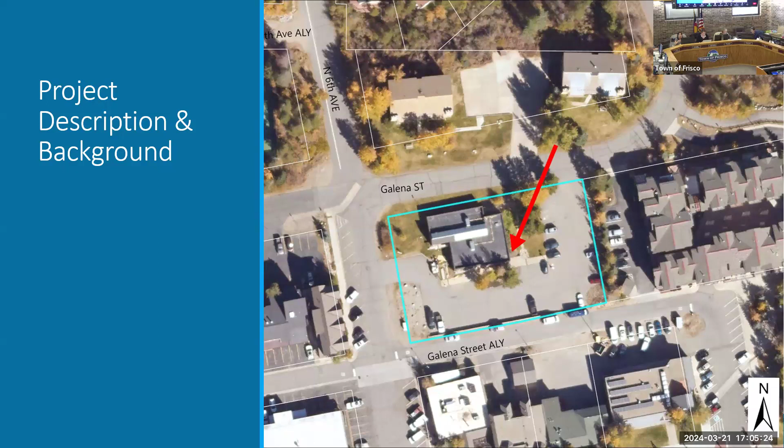Turn the volume up a little bit in the room. Thank you, we just had a request from the audience. Thank you. Yep, no problem.

Sorry — oh no worries. All right, here's just an overview of the site plan. Just as some background, the Planning Commission did review the sketch plan of 602 Galena Street on August 17th. There was a prior sketch plan before that, but the one on August 17th is most relevant to tonight's final review.

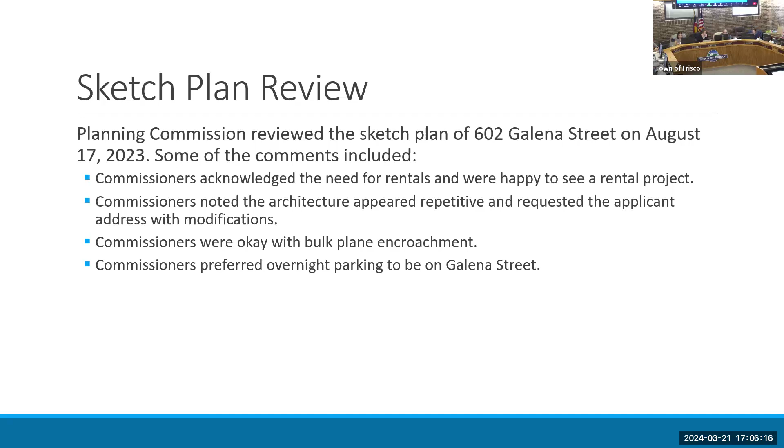At that time, commissioners acknowledged and appreciated the rental aspect of the application. Commissioners noted that the architecture appeared repetitive. They were okay with bulk plane encroachment and preferred overnight parking to be on Galena Street rather than Sixth Avenue. This is just a few of the comments; the complete minutes were in the staff report for that meeting as well.

So that is one of the requirements, that all units have to be deed restricted. For this project, each dwelling unit, to meet the code requirements and be eligible, shall be deed restricted with an average AMI not to exceed 120% for the project. The applicant is proposing to utilize this program and is therefore eligible to receive certain zoning flexibilities as outlined in that code section.

Starting with dimensional standards, the maximum density in the Central Core District is 16 units per acre. For a 0.72 acre site, that would allow for 12 units. However, the applicant is proposing to utilize the affordable housing incentives related to density bonuses and is proposing 54 total units, all deed restricted rental units with an AMI of 120%. If the Planning Commission finds that the additional units do not detract from the character of the neighborhood, then the application meets the density standard.

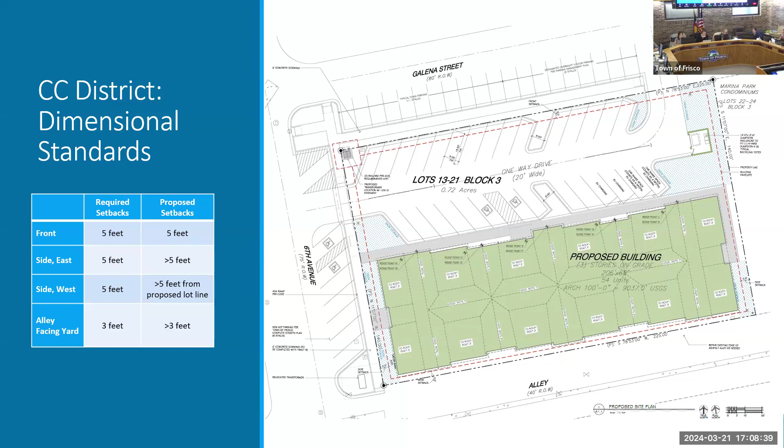One thing I want to touch on: affordable housing developments are exempt from step backs on alley-facing facades. However, the development is still required to have a 10-foot step back along the facade facing 6th Avenue. The code states that step backs shall be taken from the 3rd floor and above of street-facing wall facades. The application is not meeting this requirement, but staff has talked to the applicant about modifications and believes they can be made. Staff finds they will be able to meet this requirement with modification, and therefore recommends the Planning Commission add a condition of approval requiring the applicant to meet the 10-foot step back requirement on the western building facade prior to building permit submittal.

Moving on to access, grading, and drainage, this has been reviewed and approved by the town engineer. The applicant is proposing access from Galena Street and from 6th Avenue. The two accesses create a one-way drive with the entrance on 6th Avenue and the exit on Galena Street. Access meets the requirements for Public Works and Summit Fire. The red line plans in the packet show comments that have been addressed—those were referral comments the applicant first received, and revisions were made, including increasing the drive aisle width for Summit Fire, which was a big change.

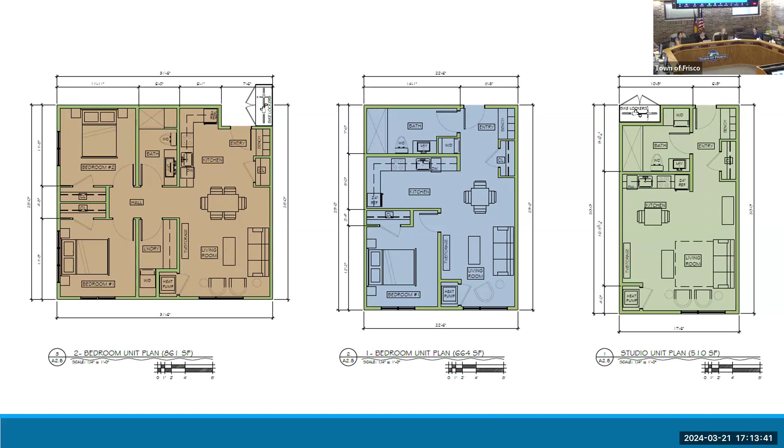This is a breakdown of what each unit type looks like. The applicant is proposing 21 studios, 21 one-bedrooms, and 12 two-bedrooms. You can see how the bike storage lockers were incorporated into those units.

The applicant is showing a trash enclosure on the east side of the parking lot that will be consistent with the materials of the building. Staff had recommended a condition of approval that elevations and a letter from a waste management company be provided at time of building permit submittal, to ensure wildlife proofing and accessibility for the waste management company. Since the writing of the staff report, the applicant did provide both of these, and staff found them to meet code.

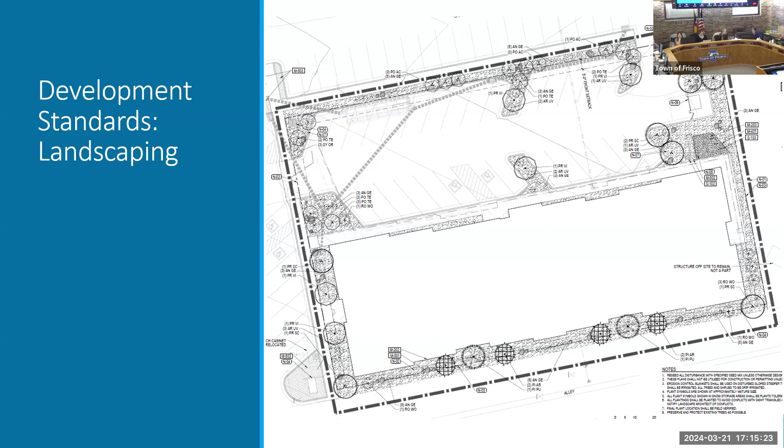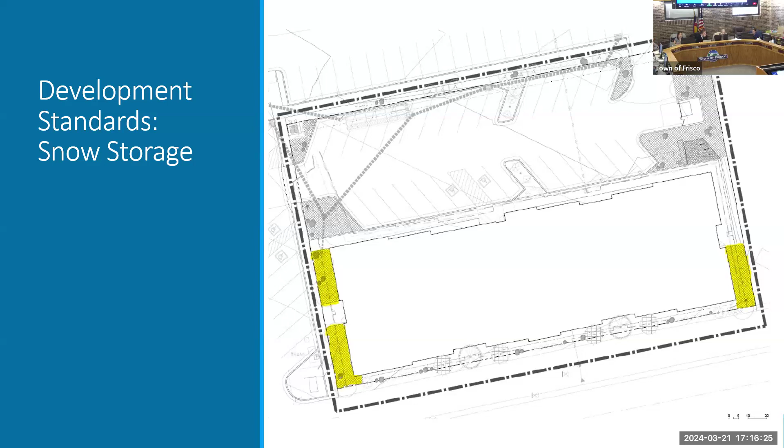The UDC specifically states that all snow storage areas shall be located lengthwise adjacent to the applicable paved areas. Staff did question whether the application meets this standard based on the highlighted sections on the site plan, and whether those would be considered lengthwise. The applicant has provided a supplemental narrative addressing snow storage and requested the opportunity to present their case to the planning commission, so I'll leave that there for now. If the planning commission finds that the proposed snow storage plan meets the intent of the snow storage section, then the application meets this standard.

Moving on to facade standards, the proposed buildings demonstrate building articulation through the use of at least 2 of the 7 techniques outlined in the UDC. At sketch plan review, the planning commission commented that the architectural elements appear repetitive. The applicant did not modify the facade between sketch and final. However, staff does find there is some architectural relief from the duplication of units through the use of building materials, and therefore finds that it meets that standard.

Proposed exterior building materials include horizontal siding in sand and vertical siding in a coffee color, as well as split-faced CMU tiles in dark gray. They do have a material sample board on the table over there, so we can pass that around later. The proposed roof forms generally deposit snow away from parking areas and walkways, and the flat roof is augmented by pitched roof elements, with proposed pitches of 9/12. The application is meeting the building material requirements and the roof requirements.

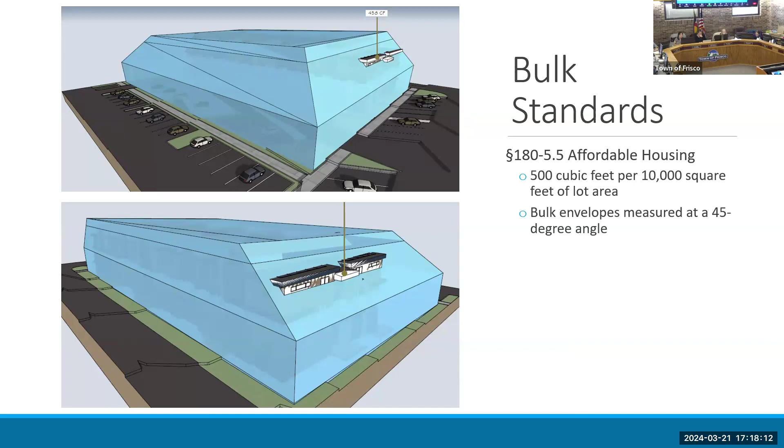So that's all I have for the presentation. For recommendations, we'll leave it up for the planning commission to discuss, but should the planning commission determine that the application meets the criteria of approval, staff provided recommended findings in the staff report. And again, should the planning commission determine that the application meets criteria of approval, staff has provided recommended conditions.

These were the conditions listed in your staff report. You can see the one crossed out is for that trash enclosure elevation. They did provide that, and that was really just to ensure it was fully enclosed and wildlife proof. So staff does find that it's meeting that, and therefore crossed that out. And then also adding that condition at the bottom after talking to the town engineer with the traffic study, adding that intersection as an addendum to the traffic study.

That is all I have for now. I know the applicant is here and can answer questions. I can answer questions too. You did receive a public comment today submitted by Jim Kidder on behalf of the Scattered Pines condo development, so everyone got a physical copy of that for the public record. Thank you, Emily. Questions for staff?

April, we'll start with you. Is the Town of Frisco responsible for snow plowing the alley? Yes. Okay, and that snow, where does it get stored today?

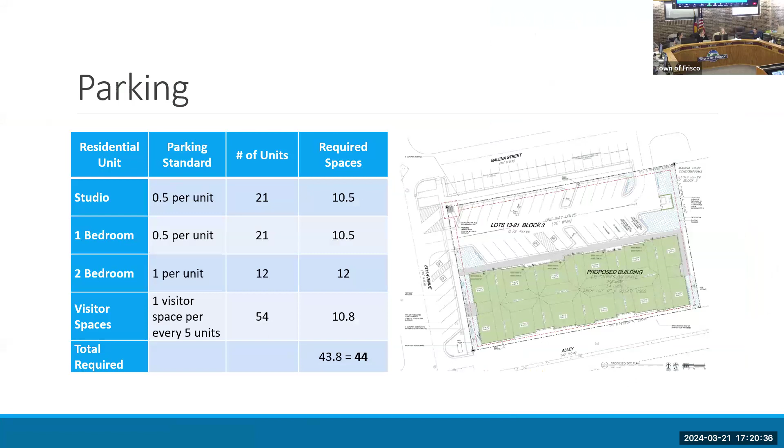Jessica, any questions for staff? Yeah, and sorry, I probably should know this, but can you give me an understanding of the genesis of this project with respect to town code? In terms of the 120% AMI, did this—yeah, I think you're nodding, so.

Yeah, so there were revisions made, and maybe Katie can touch on this a bit more because it was brought to town council. Town council ultimately approved the 120% with a recent ordinance. That was from a planning commission recommendation that went to town council, and then it went to town council a couple times, and ultimately they changed that percentage to 120, from 100. It was 100 for this district, yes, and now it's 120. Yep, that is what it is.

Okay, but when it was before us, was it 140? It had gone up to 140, right? And then council changed a lot—pretty much everything that had been proposed got modified a bit, and it was just a clean change in the code to: a development project with an average of 120% AMI would qualify for the affordable housing incentive.

So before that it was 100% AMI. Now any development in town that's 100% affordable, up to 120% AMI average, qualifies for rentals. And Katie, can you push your mic closer when you speak? For rentals, and also for ownership? Same thing, okay. Yeah, they're both under—we didn't separate it. The planning commission had asked the council to consider having some differences between rentals and owners, and they didn't.

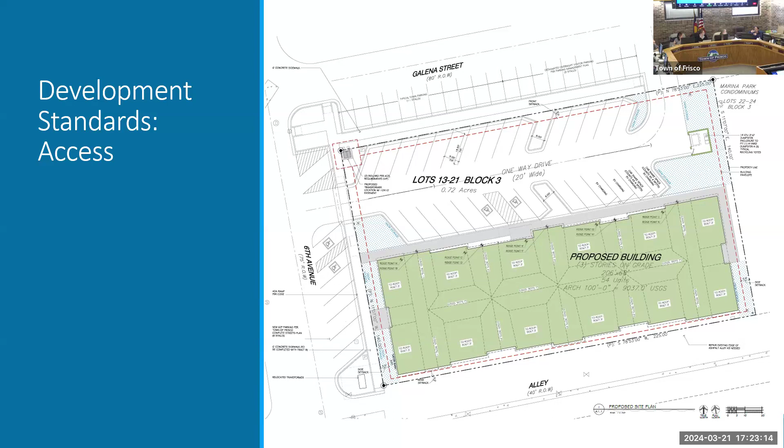One quick question about the facades, the longer length facades - you said planning commission had expressed some concerns that they looked similar to one another, but staff was able to find that they didn't look similar. Could you go over what you found? Looking at the code, it states that they shall provide relief from the duplication of units. It doesn't give a threshold of how much that is, and it doesn't give those specific techniques you see in the earlier sections of the code as far as articulation standards. So given that there is a change in building materials, it does limit the duplication. They're still quite repetitive, but there is some relief from exact mirrored images.

But it's based on the building materials. Yes. Okay, so those are different horizontal materials from one to the next? Right, switching it up and adding the blocks on different sections. Okay, I might ask the applicant to take me through that - they're a little different.

If they were just standard conditions, you said in the proposed conditions of approval to meet the requirements from Public Works and Town Engineer - were those all very standard things? Yep, the applicant shall satisfy the conditions of Frisco Public Works and Town Engineer. Those are just standard. They've already addressed the comments that were given to them, those red line comments. I like to keep those in there just as a reassurance that when it goes in for building permit, if something needs to be tweaked, for Xcel, for transformers or whatever, that we have that ability.

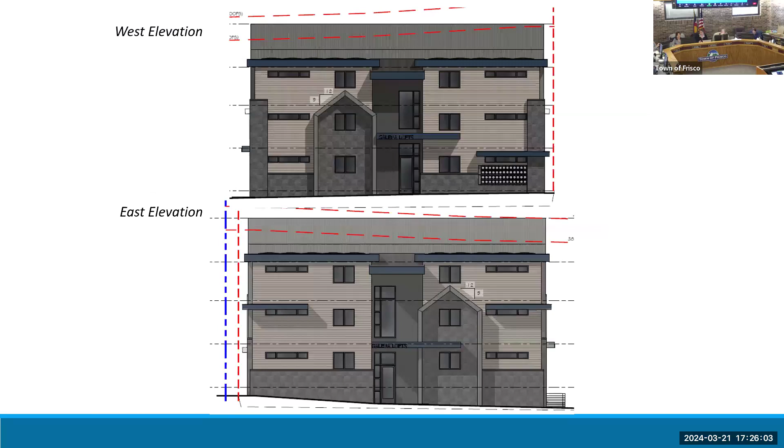So you talked about the repetition - if we look at the rendering, there are basically 2 or 3 materials shown. This is the same sketch that was delivered at the first hearing. They did not change the facade or materials. They didn't add or detract any - so this is really all the same as it was, just a different interpretation on your part. Okay, and then I'll ask them about parking and solar.

Any questions for staff? I guess I had sort of the same question, I wasn't clear - if there were no changes made, is that typical? I mean, if we have a finding at sketch that this is what we thought and it comes back the same, it seems like it's ignoring the comment. I don't know if there's a question there - it's not more the same, I just wanted to make sure I understood that nothing changed. The facade has not changed.

As I stated, there's not a certain threshold on relief from duplication. It's not like the section before, when it comes to articulation, which has very specific criteria - it needs to meet 4 out of 7 or 2 out of 7 techniques. The standard for duplication is more vague, and therefore I can find an interpretation that using and changing building materials means they're not exactly the same each unit. I left it at that, but planning commission can definitely comment on that.

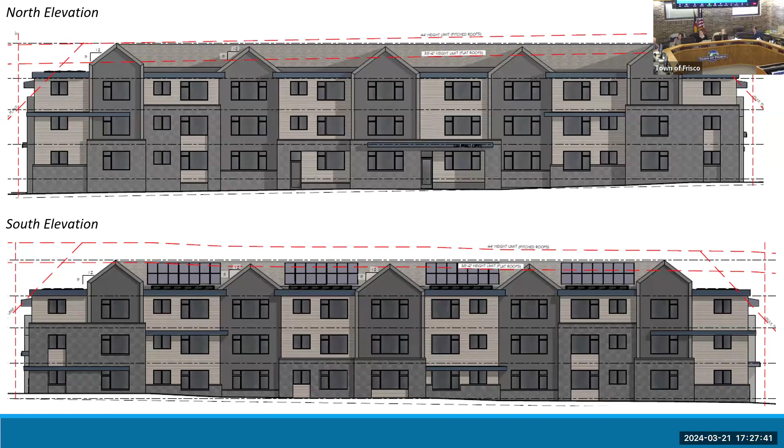I had a couple questions about the step back in the building and the dumpster enclosure elevations and all that kind of pops up at the last minute. Why wasn't that caught sooner?

So the step back, and it should have been caught sooner - there is an interpretation, or a misunderstanding, that because there's 10 feet from the property line, it didn't have to meet the step back requirement. But reading it word for word, it definitely does have to have a 10-foot step back from the floor below. The code states from the floor below, not from the setback line, not from the property line, and unfortunately I caught it late. Okay, that makes sense. Yeah, I can see how that would be confusing.

Yeah, and it is exempt from the alley side, so it's just that one facade on the street. For engineering, 6th Ave, yeah.

On the parking, a 2-part question. I'm pretty sure it says in your staff report, and I just double checked it, that the 11 extra parking spaces will be constructed and managed by the town for public benefit. I guess I'll need to double check on that, I may be confused. The additional 11 parking spaces proposed on Galena and the 8 on 6th Avenue are to be constructed and managed by the town for public benefit, so they will be public parking spaces. My understanding was that they were going to be constructed by the applicant with the building. I'd have to confirm that, I guess.

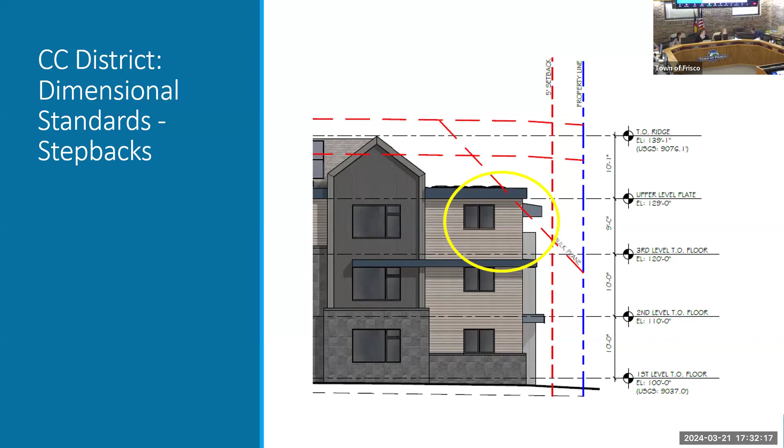Hello, Planning Commissioners. Thank you very much for your time tonight, and staff, thanks for working with us on this. My name is Megan Teston. I work for Norris Design and I'm representing the applicant. Neil Drobenair is here with NHP, and also this is a partnership with the town of Frisco.

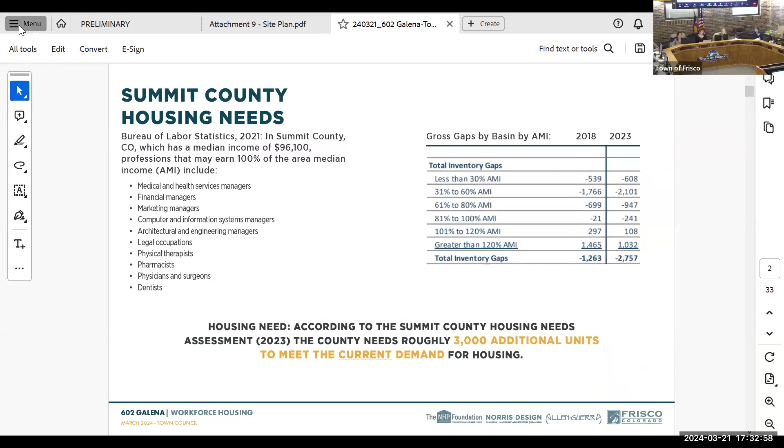So I know we've seen a lot of this. You can go to the next slide, Emily. But just a little bit on background on needs - we're really looking at almost a 3,000 additional unit need for affordable housing within our county. I just want to bring that up again as a reminder to the importance of this project, putting affordable housing where people can actually live and work and commute all at the same time.

A little bit about NHP Foundation - they're a non-for-profit foundation that does affordable housing exclusively all over the country. They have a mission and values and a vision, and this is what they do. Not only do they develop it, but they also long-term manage properties as well. They do neat things like give people credit, help them build credit for paying their rent on time. They'll issue statements like that for banks to hopefully help people with upward mobility. So I just want to make sure we kind of keep that in mind.

And I know that some of the planning commissioners haven't heard the spiel, so I'll keep moving quickly. But as I said, NHP also is working with local stakeholders and they're in a partnership with the town on this project to be affordable housing in perpetuity.

I think this one's really interesting too, though. The site context here - if you look at the half-mile and one-mile radius, we're really locating housing in the heart of town and also at the heart of transit within the county, which is one of the neat things that Frisco has to offer in terms of being able to be truly mobile without the use of an automobile.

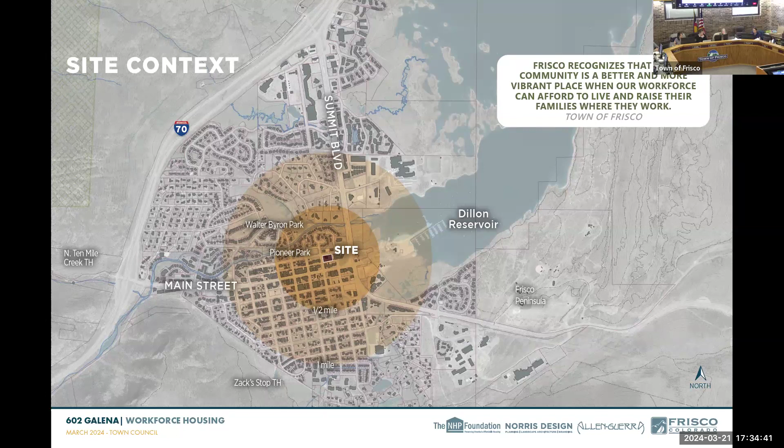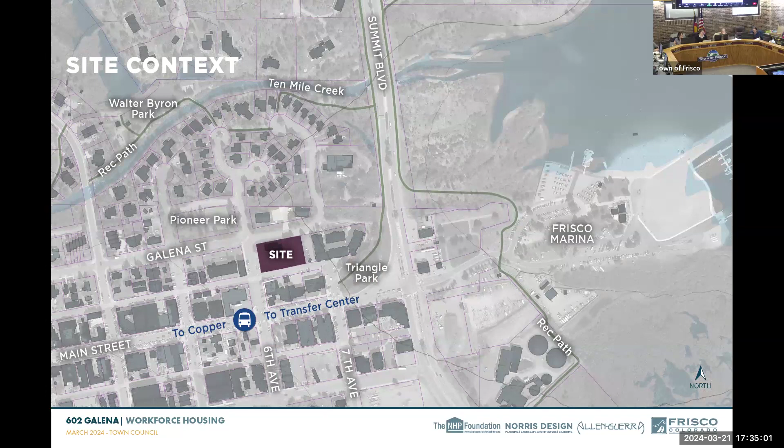A little bit closer zoom into where we are. You can see 6th Avenue, Main Street, the proximity to both Pioneer Park and Triangle Park, and also the kind of transfer in between the commercial frontage on Main Street and a more residential community in the back - by back, I mean north.

Here's a quick site plan for us. It shows the landscape as well as the parking and the building. I'll just really quickly talk a little bit more about the location of the building and the parking lot. This was discussed after that last planning commission and that comment. Really what happens is the grading on the site and the traffic circulation is much more desirable from an engineering perspective to have traffic coming off of Galena and 6th rather than the alley on 6th in terms of circulation. And it works better with the site grading as well. So those are kind of the main factors for keeping it that way.

We also felt that, yes, we're shading our own parking lot, but at least this way the building is not casting shade onto our neighbors to the north.

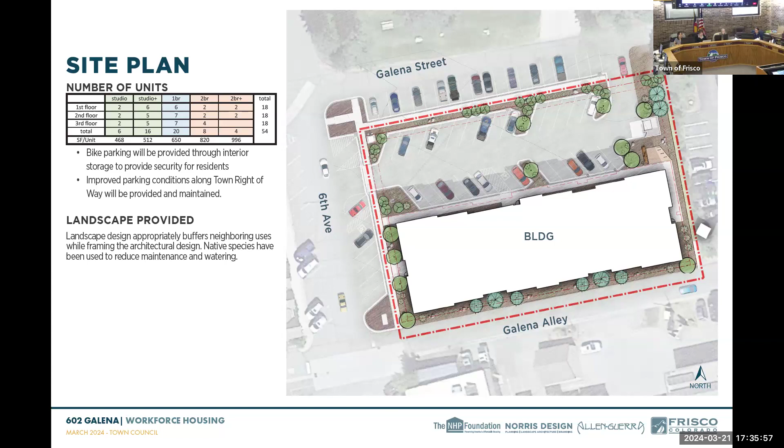Snow storage - I just wanted to clarify a little bit about snow storage and the interpretation of the code. We feel we meet snow storage on site for the requirements. We have 25% of the snow storage for all paved surfaces, including walkways and parking, provided on site. All of the snow storage area meets the 10-foot widths. And it is not shown in the right of way or on adjacent properties. Snow storage is adjacent to all sidewalks. I think that we got a little hung up on the word lengthwise, which might be left over from when you really read the code.

It almost says you're going to plow everything. That's not necessarily the case in practice. So we feel in practice that areas adjacent to hardscape along walkways are appropriate for holding snow, and it meets the overall intention of the snow storage, which per quote, the dimension of the snow storage area must be adequate to serve the snow storage purpose.

So I didn't really say it, but the yellow is all the hardscape and the navy is the snow storage.

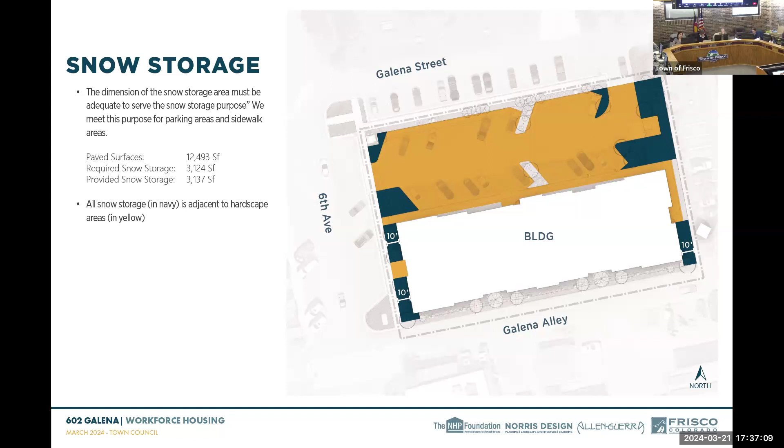Parking - this is, Lena, kind of to your question, the 9 visitor spaces on the street will be dedicated to this project. The additional 11 and then the 9 on Galena will be developed as a community benefit, but will be maintained by Public Works.

Megan, can you clarify, would those be constructed by the applicant or the town? Do you know? Sorry, I think that was your question. I'm pretty sure that it would be constructed by that. Yes, I'll let Neil answer that.

The other thing we need to talk about is we're realigning Galena Street with this application, and this is per Chris McGinnis in the engineering department. So I think there's a lot of work that's happening to this street simultaneously, and obviously some of it's going to be paid for by the town, and I'm not sure how all that's going to mesh and how they're going to break apart the numbers. So this is something that's going to have to be discussed further. That's it, thank you.

I'm not in those meetings.

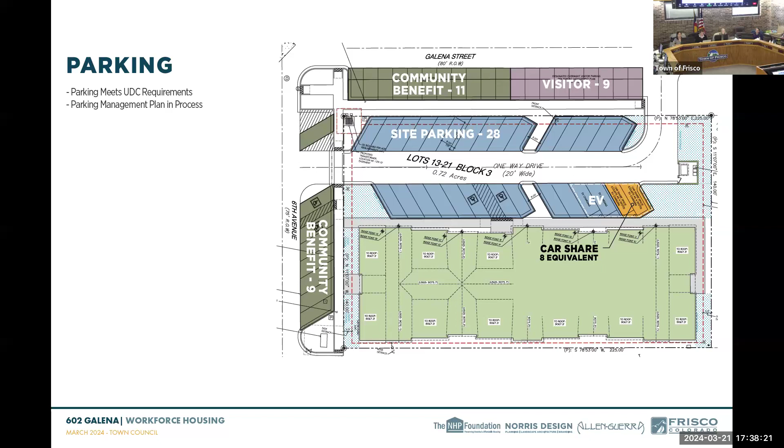All right, and with that, I'm going to turn it over to Suzanne to talk a little bit more about architecture.

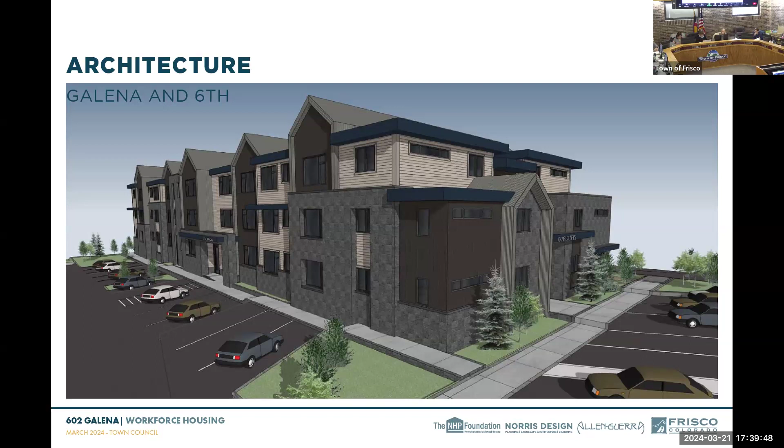And therefore reducing that repetitiveness. If we go to the next elevation, you can see the same thing. I also wanted to bring up that as these buildings wrap, you never see a building straight on like you do in those elevations. The corners are very different — we're stepping those corners down, we've got entry elements, we've got all kinds of things happening on the corners that are different on each end. So that reduces the repetitiveness.

And then if we look at the straight-on elevation here — it's hard to see on this, but if you could see this closely, you would see that even amongst the gable elements, for instance, the far left gable element has narrower and fewer windows, and the center ones have more windows. So we're varying the windows within that facade as well.

I also wanted to bring up that this is workforce housing and we do have 3 unit types, so there's only so much we can do. But I agree — I did not change this elevation because I didn't necessarily agree with that comment last time. So, sorry.

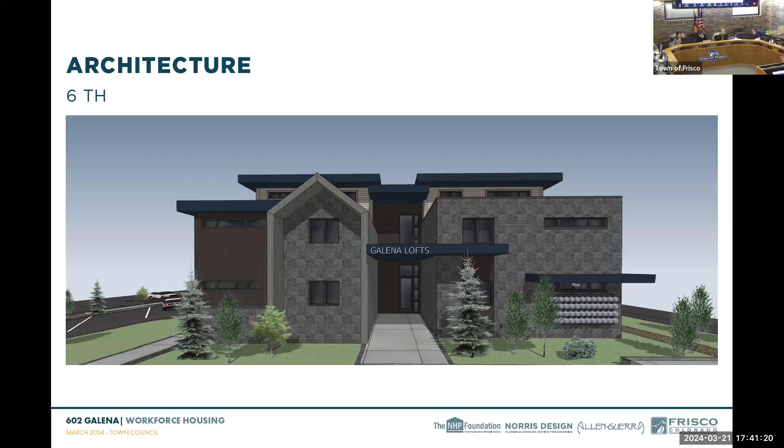And then let's see, what else do we have? Okay, so regarding these elevations, you can see that elevation is so different than the side elevations or the other end. But if we go to there, yeah.

So talking about bulk plane, we did come up with a new option for stepping that 3rd floor back because we were completely unclear — we thought that if our building was 10 feet back from the property line, we were good to go and could just go up 3 stories. We didn't understand that the 3rd story, no matter what, has to step back.

So from 6th Avenue, that was an area where we had about half of our bulk plane encroachments. Once we found out that was an issue, we actually pulled the lower 2 floors out 3.5 feet and the upper floor back 6.5 feet to get that 10-foot step. Therefore we almost eliminated our bulk plane encroachments on 6th, which eliminated about 450 cubic feet of our bulk plane encroachment — it actually solved 2 things with one comment.

So let's see what's next on that. This is just showing what we did to the plans and elevations to adjust to that 3rd floor step-back comment. So if you could flip through the floor plan.

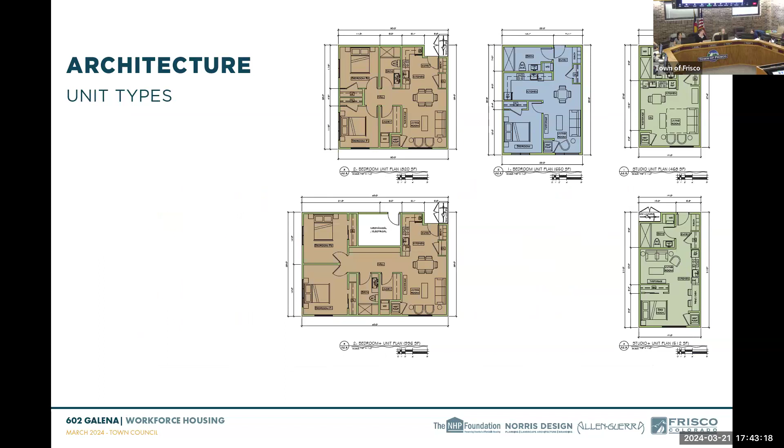So here you could see on the left side — if you flip back and then forward again, you'll see through that slide. And then forward again, you'll see on that left side, it steps back. And then if you flip forward again, you can see it — well, this is just the roof, and these are the unit types. Flip again and we'll see the elevations, I think. Maybe I'm missing the elevations that have the step back, but anyway — yeah, so there we go.

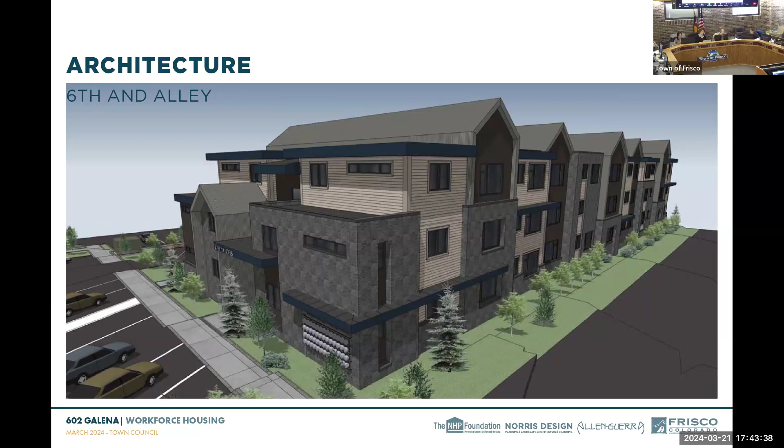So I think we have a good solution. It was pretty painless actually, to that 3rd floor step back. Can we go forward again?

I just want to show you guys the dumpster enclosure that we drew. The architecture is similar to the building. It's got that wrapping metal piece. And then, is that it?

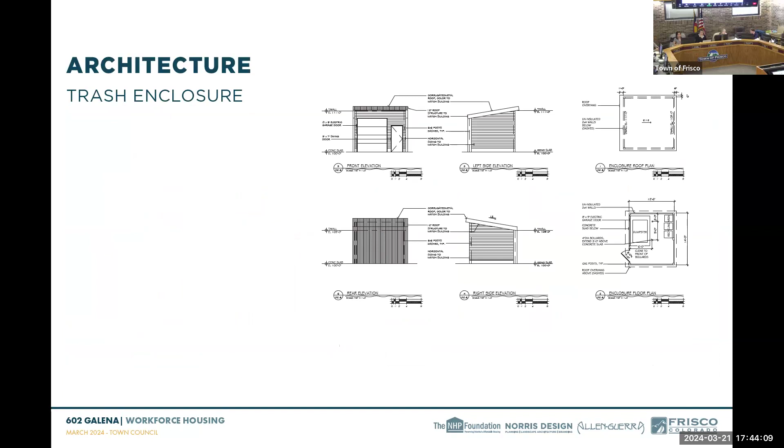I think that's it. So let me just quickly see if I touched on everything here. Oh, we do have that comparison, you know. That's right after the flip blank slide. Okay, so last time you guys had asked me about the 3rd floor step back, but anyway, keep going.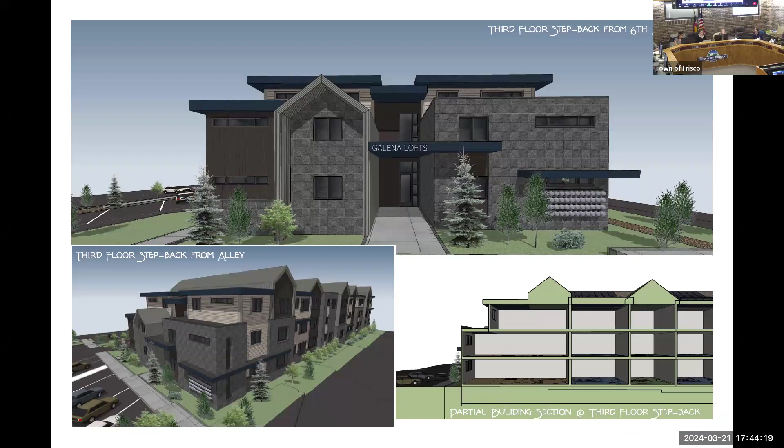Oh, so okay, go back one. So last time you guys had asked me, someone had said, gosh, this looks just like 101 West Main. And so I was like, well, it's really our computer program, I think.

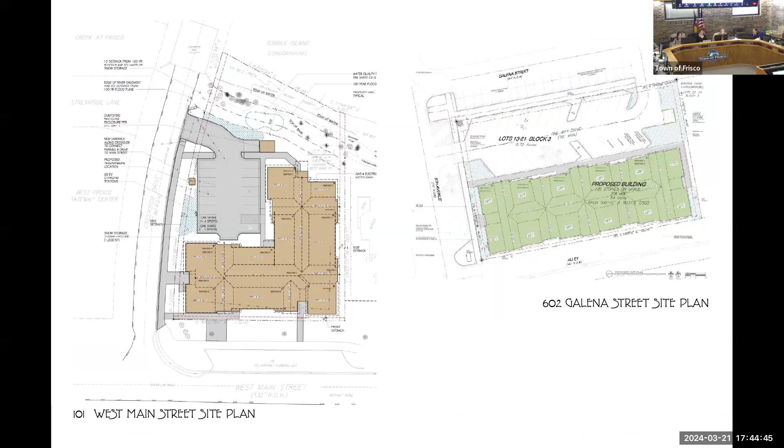So I just want to show you guys, 101 West Main is on the left. It's in the brown. It's an L shape in plan. Galena Street is very linear in plan. And then if we flip to the elevations, what we have currently on the upper drawing is West Main.

So I just wanted to show you that comparison because that comment did come up last time.

And then basically, let me just quickly go through the changes based on the referral comments. When we sat down with the fire department, they asked us to have a 20-foot access width. So we widened the access drive from 18 feet to 20 feet to accommodate the fire trucks. We added a fire control room and hydrants.

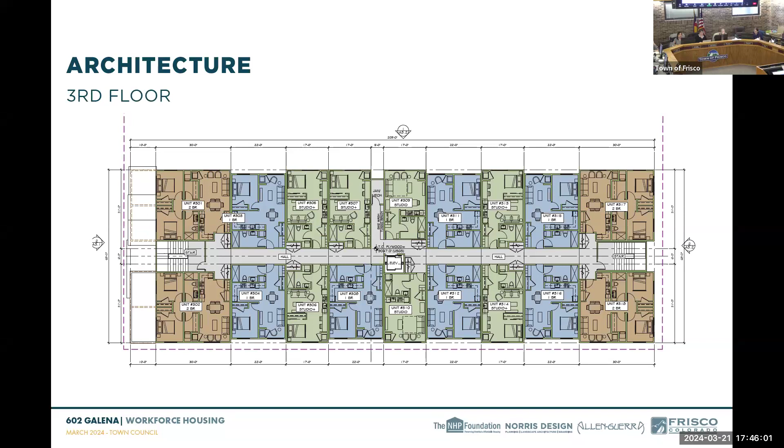Xcel asked us to move the transformer, so we did that to the corner of the lot. And we moved the electric meter bank on the building to be on that west elevation, and have the drip line requirements that Xcel requires. We meet those now.

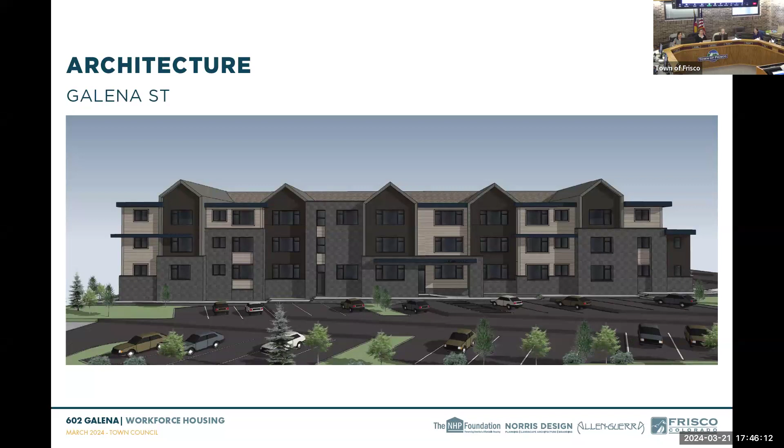Engineering, I think we're meeting all the comments from the engineering department. We worked closely with Chris McGinnis. Per what I talked about earlier, we are shifting the center of Galena Street, per Chris McGinnis, to the center of the right of way. So it shifts it pretty significantly. I'm not sure how all that's getting done, but Chris wanted that done.

Then the bike lockers—if anybody wants to see the specs, we've got a manufacturer that we're working with on those bike lockers, in the hallways. And building heights were way under, I don't know if there's a comment there.

That's it. Thank you. Thank you so much. Thanks, Suzanne and Megan. Questions for Galena?

I'm going first. So what you showed tonight, the step back, that wasn't in the packet. No, so that staff has not seen that. Okay, so, okay. And same thing for the dumpster.

Technically, that wasn't—I had seen it, yeah, it wasn't in the packet, but we had been emailed the dumpster elevations in a letter from a waste management company earlier this week.

Okay, but for the purposes of what we're approving, I feel like either we don't need a condition for both or we need a condition for both, not one or the other. For what? You have a condition around the step back and another condition around the dumpster elevations. So I'm just, since what we're seeing here is not actually what was in the packet.

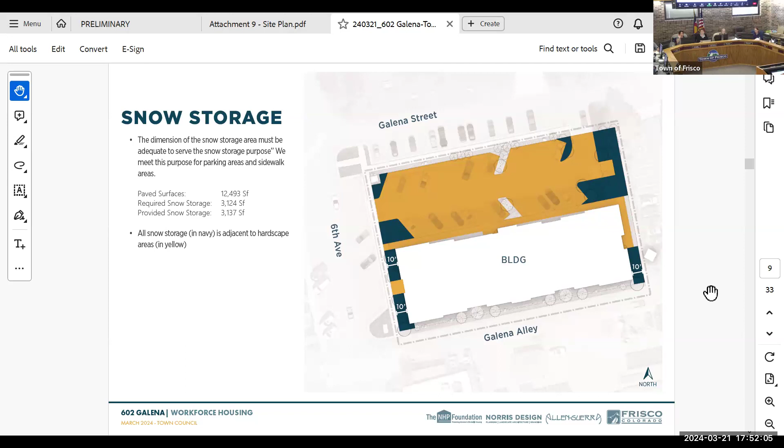Okay, so how are you shifting the street towards the north? Do we have a drawing of that anywhere that shows that? Yes, I can look. I'm not sure if it's on a slide, but I have it. Not on a slide, sorry.

Right now, the Galena Street as it currently is does not follow the median line of the right of way. So when you're looking at it at the northeast corner - there you go - the dark gray and the light gray, you can see the new. Okay, you know what I mean? Got it, yeah, thank you.

Yeah, I'm pulling it up too, my computer's just slow. And then my last question has to do with the materials. I guess I can follow your argument that it's not really repetitive and I get it, but also the CMU is going to be beautiful textured CMU, right? Yeah, it's split face, it's really cool.

Okay, because I hear CMU and I think - no, no, it's like what Frank Lloyd Wright used to use on a lot of his buildings, he did different things with CMU. Well, I mean this is similar, but not quite exactly - we're different, but yep.

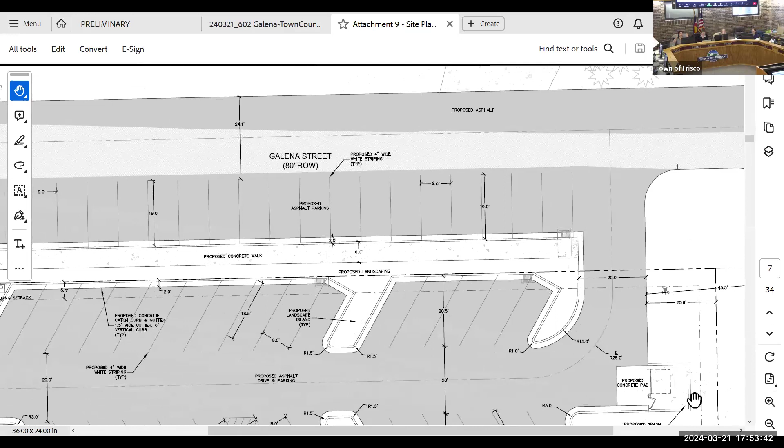But they have to price it still too, so we'll see. And possibly a terrible question, but since you're the designer and I'm definitely not - could you do something in the middle of the building to sort of, since there's like, feels like, how many - could you put up an elevation? Thank you, Emily.

Sorry, my computer is not liking these large PDFs right now. But we'll go back to this one.

Yeah, like that one. So the repetition is the brown sections that seem similar across the building. Walk me through why there's no reason to accent something in the middle a different way so it's not so repetitive. I think it looks fine the way it is. The bases are super different, and that breaks it up visually. But if someone wanted that centerpiece totally different, we could do a flat roof on that piece instead of a gable. But I honestly believe this looks better than a flat roof would, because it'd still be the 3-story element.

Definitely not a flat roof, but I guess I don't want to play designer, so I trust you. Okay, those are my questions. Ira, questions for the applicant?

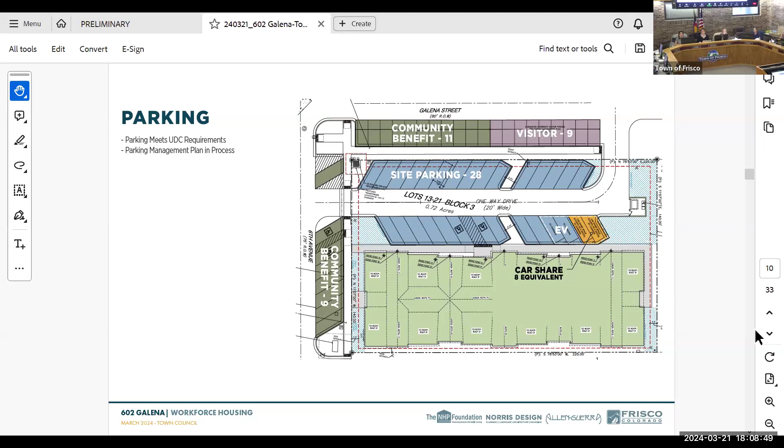Yeah, Emily, do you mind pulling up the new step back elevation? I just had a question around that look of it—is that an actual balcony now, or is that just a flat roof? So that's a flat roof, because it has an interior drain, just in order to make it work with the code and everything. A shed roof wasn't really going to work that great in that location. And it's definitely not a deck, because that's super expensive. It's just off a couple bedrooms, so it doesn't make sense financially to make it a deck.

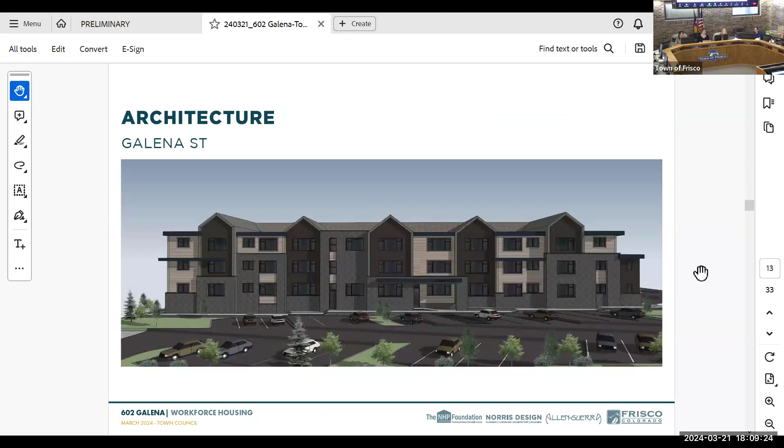Did that cause you to adjust the square footage on that floor for those units? Yes, so the upper floor reduced square footage, and the middle floor and lower floor increased square footage. The overall square footage went up slightly.

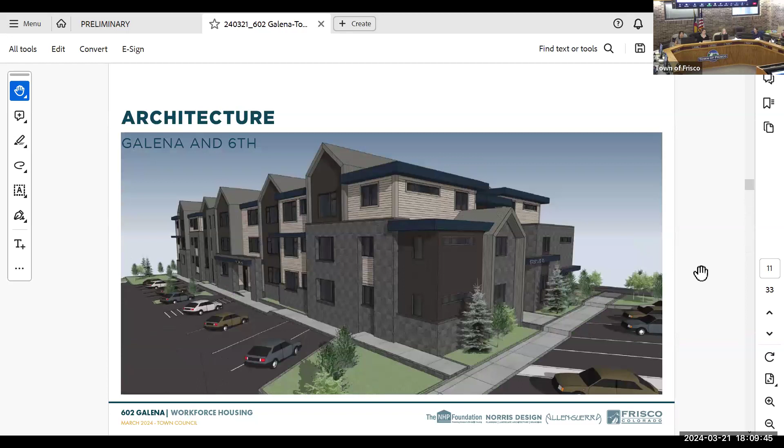A separate question around the bike parking—there's been mention of outdoor bike parking that's seasonal, but where would that be placed? Because I haven't seen it on any of the plans; I sort of glanced over it. It is placed—you can see, thank you, Emily, right there.

Okay, and just a little bit out of our purview, but do the doors into the building lock? And do you have to have an access point to get in, or is it open? We always have controlled access. Okay.

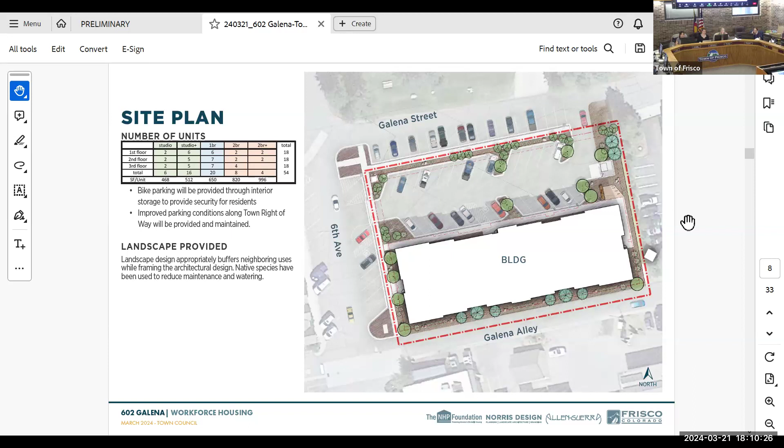I think that's it for me. Any other questions for the applicant? Just one follow-up - the bike parking is essentially the storage unit, there's not an additional storage unit, correct? That's for in the hallways? Yeah, and it's really cool because you can store skis in there or 2 bikes fit in there. So it's sort of vertical or... they're horizontal, actually. Okay.

Sorry, one or two more questions. Is it part of your model to include things like parking fees? No, you don't charge for parking. Okay, because that's come up in other affordable housing developments in Summit County. So we're all thinking and talking about that because it's another way of making it unaffordable, especially if you're starting out without enough parking. I hope you don't need to institute any parking fees. Yeah, the way we look at it is if we're saying something is 120% of AMI or 100% of AMI, you take 30% of that, and whether that's through rent, parking fees, or any other essentially mandatory fee like utilities, then you're no longer really affordable. So in our rent calculations, we start at the rent limit and subtract the utility allowance to set the actual rent.

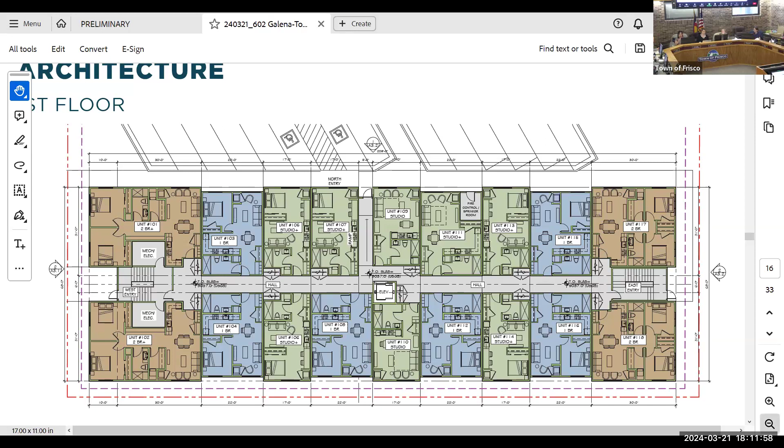Okay, and to be clear, that elevation we were looking at - is that with the step back already included? It should say step back on it. No. Go to... like that one, yeah, is that one? This, yeah, you've already done. Okay, so that's what it looks like. Yeah, it just has kind of a flat roof that'll have a central drain on it. Okay.

Any other questions? Okay, are you good? Yes, thank you.

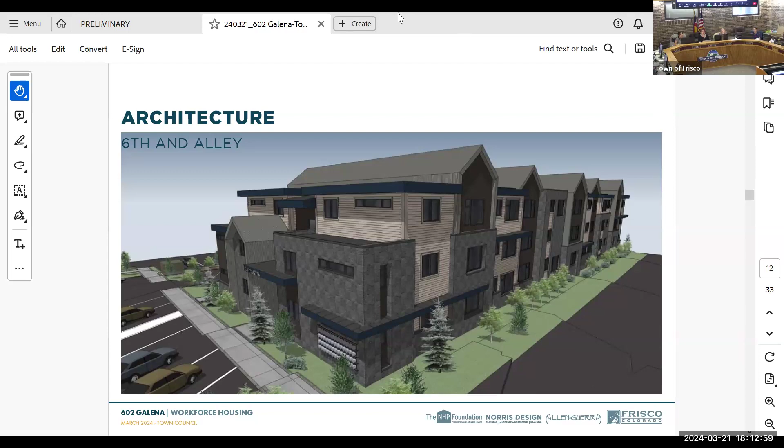My question is, both these projects were originally going to be LIHTC, correct? Initially, yeah. What was the reasoning to change the financing on this? It came out of conversations with CHFA, the Colorado Housing and Finance Authority, and we thought one of these projects at 50% would be more competitive than two, and that has to do with these buildings being quite expensive. Building here is more expensive than anywhere else in the state. And the amount they allocate in tax credit is limited, so as you expand the building and the cost, the amount of subsidy gets lower per unit, which means you have to start targeting a higher income. And at a certain point it just didn't work. Got it. So in conversations with the town, there was a desire to also do incomes that we weren't going to be able to address in LIHTC, and that's how this came about.

I have no other questions. Most of mine have been addressed, so thank you, Neil, Megan, Suzanne.

At this time, I'll open up the public comment portion of this agenda item. If you are here in the chambers or online and want to make public comment on this agenda item, now is your opportunity. A couple guidelines: please step to the podium, state your name and address, and keep your comments to 3 minutes if you could. So if there's anybody here in the chambers who wishes to make public comment, now is your time.

Like I have a short straw.

Hi, my name is Curtis Weller. I live at 601 Galena. I'm a fairly new resident there, a full-time resident. There are 8 units there in that complex, 2 buildings, 4 units each. So Emily, one of my neighbors, sent you the email today outlining some comments and thoughts - I'm not sure if that got passed around. Yes, we do all have that. I guess foremost, we were a little concerned that the date on the document originally distributed, the presentation, was the first week of January, and here we are in March, and we were just being notified that material was available for review. So we've had a very short window to think about this, share our thoughts, try to pull our neighbors together and express our concerns or formulate some questions. So this was our best shot at a last-minute collection of thoughts and questions. I don't know if it's appropriate to review those now, or if they get reviewed separately and then we get comments on those, or...

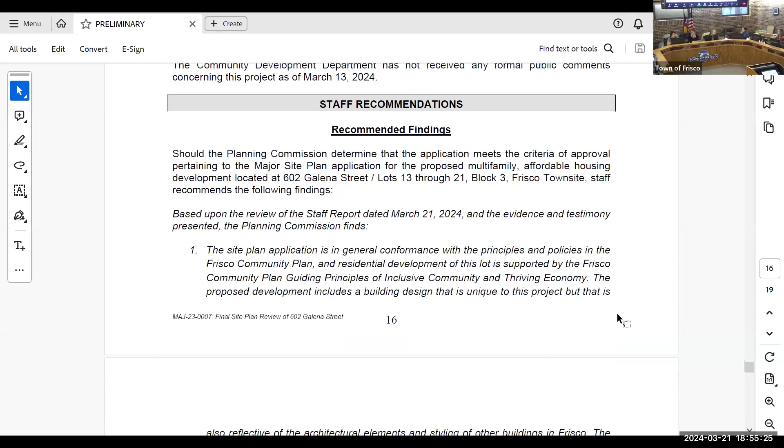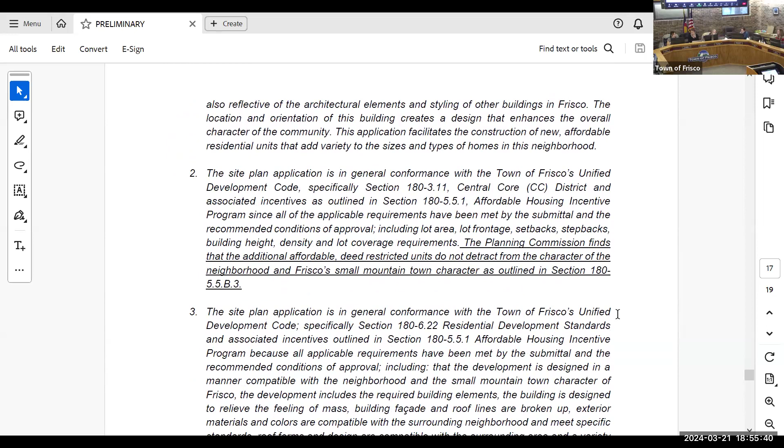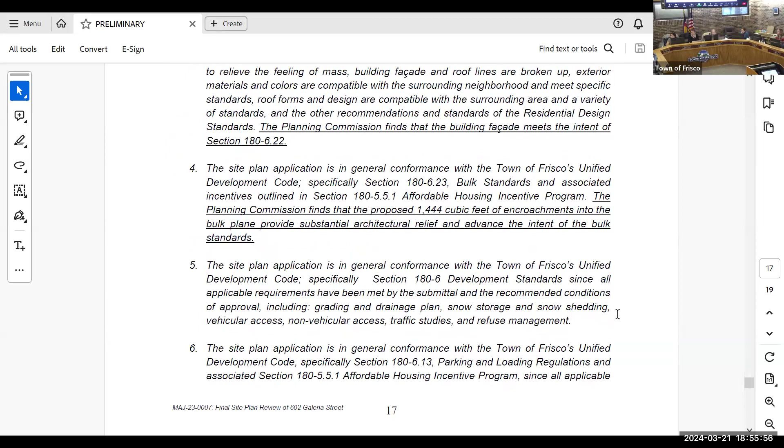So this first one is general conformance with the community plan. For density, whether it detracts from the character of the neighborhood, I don't think it does. No, I'm good. The building facade in my mind is fine. The encroachments in the bulk plane, I don't have an issue with. We just heard the bulk plane encroachment decreased. Yeah, and it decreased. Okay.

And then snow storage, yes, snow storage, I'm actually a little torn on. I would like to hear everybody's feedback on that. I think it's shown on the plan. I do have concerns in reality, but I have so many concerns about some of the parking diagrams that are shown on plans that we also approve. That's why I've emphasized that if it's not working, the developer that manages the whole site and the town will come to some way to make it work. Yeah, I feel the same way. Okay.

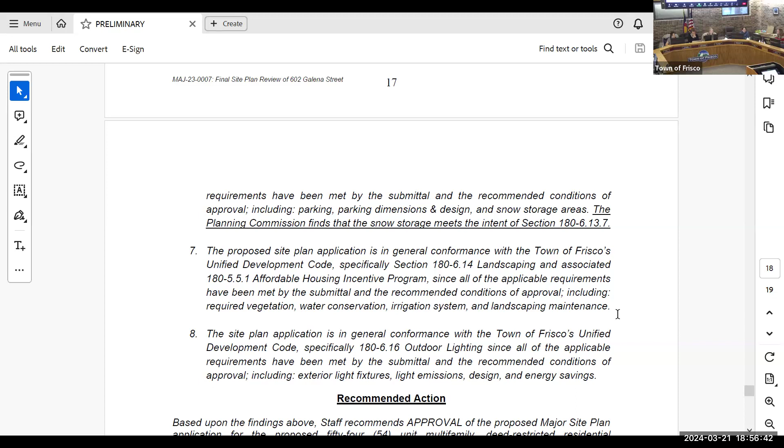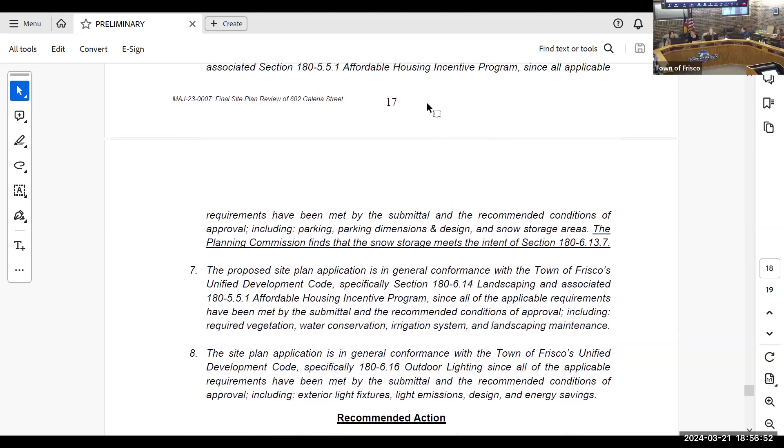So beyond that, everything we talked about, I fully support the project. And to the point around the intersection being busy, I literally live right next door and I have to make a left-hand turn onto Main from 7th or 6th every day. Yes, sometimes you wait a minute, but it's not that bad, you guys. It really isn't that bad. So those are my comments.

Any additional comments? Can I add one suggested condition, and it's only due to having plans provided tonight that we don't have in our files upstairs. It would be great if the planning commission could add a condition stating a complete and updated plan set shall be submitted to the planning division prior to submittal, so we can ensure we have a complete updated set in our files.

Perfect. So my comments are, thank you, I think this is a phenomenal project. I couldn't agree with the heartstring comments any more, that this is something we need, that it is the restaurateur, your favorite waiter. My concerns are that we are elected to uphold the code, and I have concerns about this meeting the code, that we're getting blurred with the needs and the wants and it doesn't meet the code. I think duplicity is very prevalent here.

I don't think this is something that would cause that big of a disruption to correct. I don't feel that it meets the code there. I have concerns about the snow storage, where I felt like we've made a lot of huge code changes to make this work. And if affordable housing falls under its own code, maybe that's what it needs to do, but does it fall under the town of Frisco's code? I have concerns that it's incomplete.

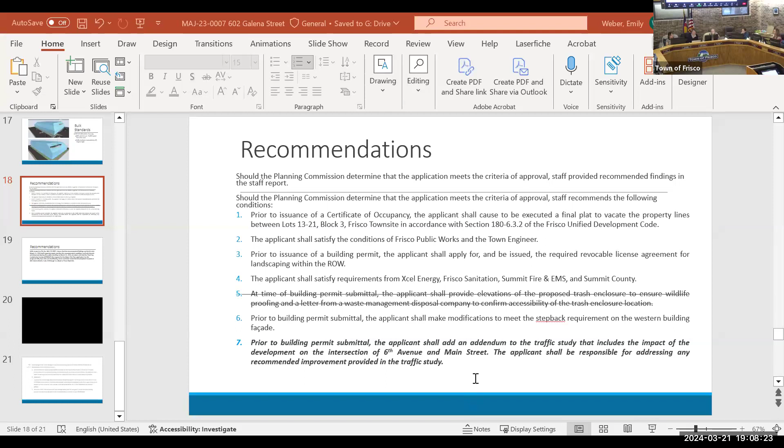So I guess it's sort of memorializing, like anything that happens, we want it acknowledged. Acknowledged or actually remediated? Well, I'm saying be implemented and completed, but not knowing, prior to certificate of occupancy for the building. It needs to have something concurrent with... This is all under the applicant shall satisfy Public Works and the town engineer. I would recommend a separate condition.

Well, would this be before they got their building permits? They'd have to submit this new traffic study per that. I would recommend that any change to the traffic study should be done prior to building permit submittal. I think we need to put a timeline in it, and then implication or correction needs to be done before CO. Like they have to have a new traffic study before the building permit, and then a resolution plan to deal with the stuff, resolution and completion by CO to get their CO.

Does that work in terms of Town of Frisco's timeline? That makes logical sense, I do think so. The applicant is looking to apply for financing, and so that will be shown when whoever they talk to for financing will see these conditions. And then they'll also know that has to be done, so the applicant will be wanting to get that traffic study done sooner rather than later to show that it's addressed in order for financing requirements.

Okay, can we talk about condition number 5? Is there any value in keeping that condition on? No, there is not, since Emily reviewed and everything came in. Does anybody have an issue with deleting that condition? Delete. Okay, so we are in agreement on 1, 2, 3, 4, 6, which is now 5, and 7.

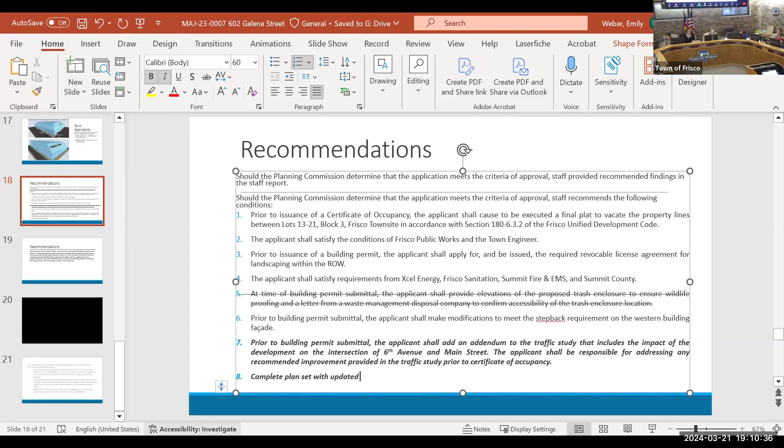Then I will make a motion with respect to file number MAJ-23-0007. I move that the recommended findings set forth in the March 21st, 2020... I've updated the motion to include the conditions from tonight. I'll read from, sorry.

With respect to file number MAJ-23-0007, I move that the recommended findings set forth in the March 21st, 2024 staff report be made, and that the recommended conditions set forth therein and discussed during the public hearing meeting on March 21st, 2024 be taken, and that the Planning Commission hereby approves the request for the major site plan application for the proposed 54-unit multifamily deed restricted residential development located at 602 Galena Street, lots 13 through 21, block 3, Frisco Townsite.

I'll second. Emily, will you please take a vote? Commissioner Connolly, yes. Commissioner Day, yes. Commissioner Forsyth, yes. Commissioner Lesnes, yes. Commissioner Tain, yes. Commissioner Withrow, yes.

Well, we wish you all the best of luck. We hope you're good neighbors and you get right on getting this new traffic study updated, and we're excited to see this go forward. We know this is a huge need, and we're looking forward to it. Thank you to all of you that took the time this evening for your public input, it's much appreciated. Before we leave, I will just put a plug in that the town is doing a comprehensive plan, which is a community vision with goals and action plans for where we want to go.